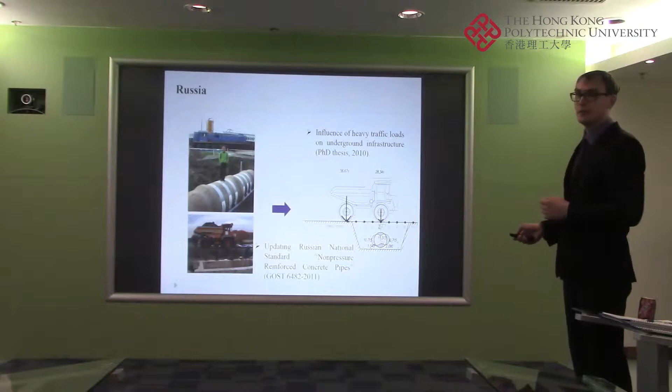Just very briefly, as Professor Shen mentioned, I got my PhD back in Russia in 2010, and I was doing my research about the influence of heavy traffic loads on underground pipelines and soil structure interactions, so a very technical topic.

After that, I was lucky to get a postdoctoral position at Tsinghua University in Beijing, and after that I worked as a lecturer as well, continuing research in the area of underground construction. This is my small research team with PhD and master students. In 2015, I decided that working for the industry would be more fun and more challenging than university.

So I moved to Hong Kong and joined Gammon Construction, and I was involved in many interesting projects here in Hong Kong, some of which got innovation awards.

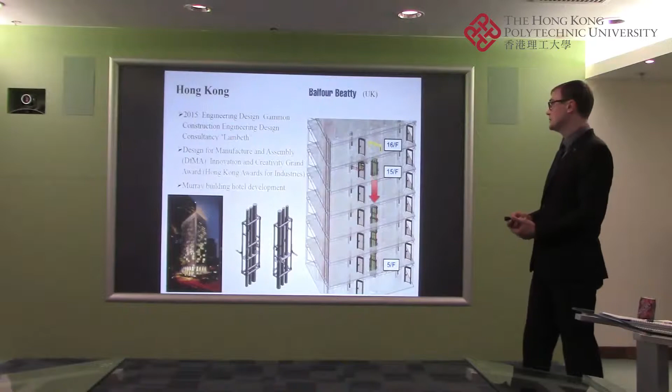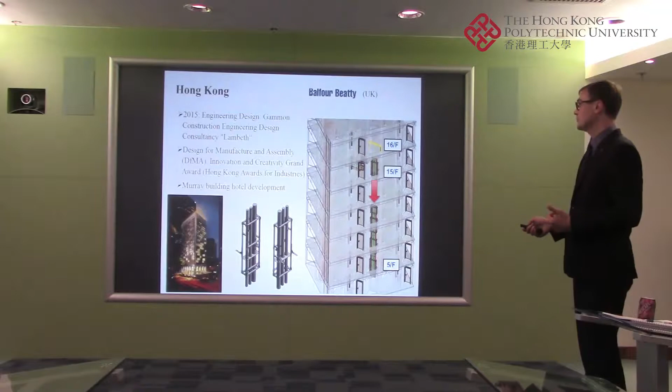For example, this is the Murray Building Hotel development. In this project, I was one of the first engineers to do the design for DfMA modules, which were prefabricated and installed in the building. As a company, we got a Creativity Grand Award from the Hong Kong Awards for Industries.

I was also involved in implementing new technologies in the Hong Kong construction market, for example the facade installation robot. This is the traditional way panels are installed — very labor intensive and dangerous, because you lift heavy panels above people, and workers stand at the edge of the building balancing a heavy panel.

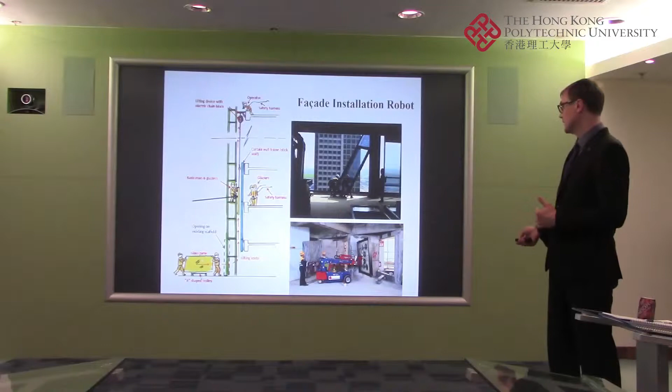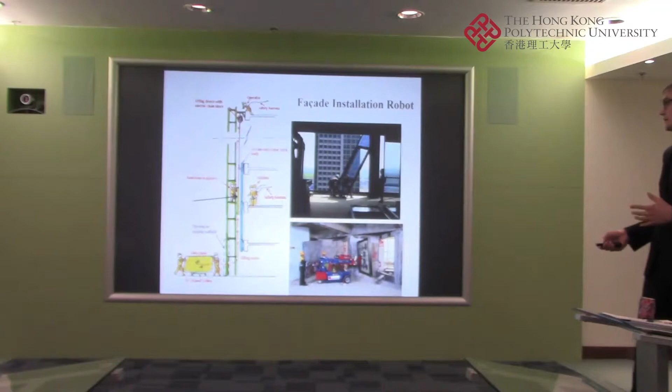This is the robot itself, which we used on the same Murray Building project. It installs the panel from the outside of the building. It's much safer, requires only 2 people, and is faster as well. After that, I was involved in many projects in Hong Kong, working with professionals from different countries.

This one is the West Kowloon train terminus, just next to a wonderful university where I worked, because it was a Leighton Gammon joint venture. Leighton is a company from Australia, so I worked with many Australian and New Zealand colleagues here.

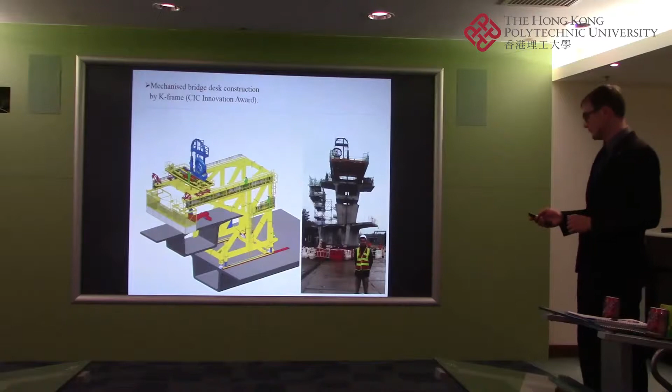When that project was completed, I worked on the Hong Kong-Macau-Zhuhai Bridge for 2 years. In this project, with my colleagues, we were involved in the design and manufacturing of the K-frame, a segment lifting installation device. We also got a Construction Industry Innovation Award for this frame. This is a brief introduction of how it works.

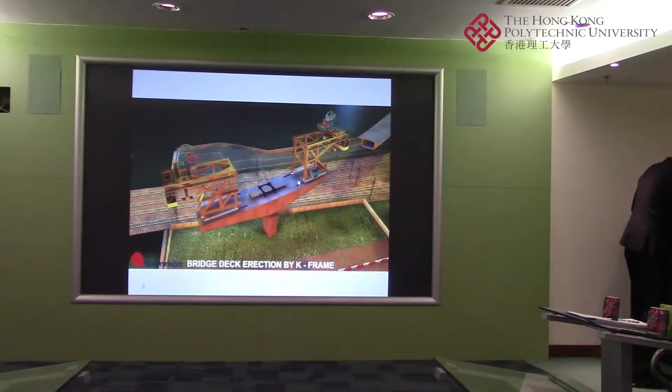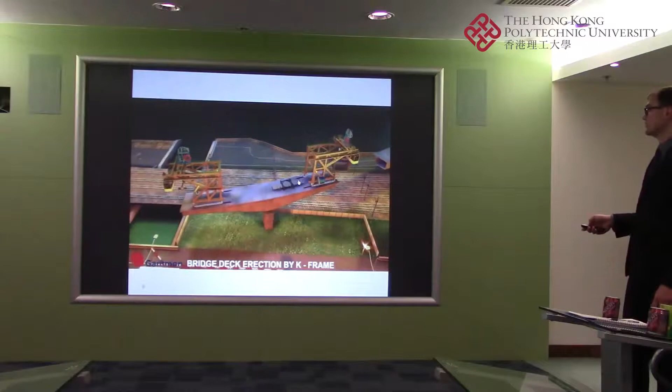So basically you have a pier of the bridge, you have several segments pre-installed, and you have 2 frames lifting simultaneously and installing the segments. So it's also speeded up the construction process and made it quite safe as well.

For Hong Kong Macau Zhuhai Bridge, I was working with colleagues from Freyssinet, so there were many French people because this company comes from France. Many of them actually had previous projects in Russia, so they could speak a little bit of Russian, like 'I'm too hungry, where to get the food,' and this kind of thing. But I really appreciate working with French people - they are very open-minded and not afraid to try new things and do something out of the box. That's why French companies in the construction market overall are expanding their business very rapidly. Maybe 10 years ago it was mostly companies from UK doing projects abroad, but now more French companies are working worldwide.

In my lecture I'm going to introduce several big infrastructure projects which were built in Russia. The first one is the venue for the Winter Olympic Games in Sochi - overall the budget was like $50 billion and many venues were built. The second part of the presentation will be about Moscow City, similar to Central, with a lot of high-rise buildings - it's like a business area where it used to be an old industrial plant before. And also a big infrastructure project, a $50 billion project for gas pipelines from Siberia to China for delivery of gas.

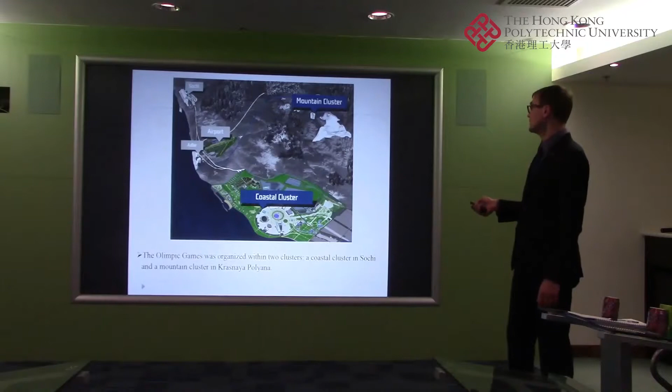So for this project we have 2 clusters - one is a coastal one, next to the sea, and one is a mountain one. Especially for the Olympic Games, a lot of new hotels were built for the residents. And this is the main stadium, Fisht Stadium.

Actually a lot of the venue and infrastructure projects which were built for the Olympic Games were used in summer last year for the FIFA World Football Cup. On this stadium, for example, there were some important games - when Spain was playing Portugal, when Uruguay beat Portugal, so Ronaldo was out of the World Cup on this stadium. So a lot of these sport venues were used last summer as well.

The shape of the stadium, or the shape of the roof of the stadium, kind of resembles a snowy peak, and you can also have a sea view since it's next to the sea. In Russia, a lot of new venues that are built try to resemble Russian spirit and Russian culture in some way.

We have the Bolshoi Theater in Moscow. So for the Winter Games, we also have the Bolshoi Ice Palace, which was a 12,000 seat venue for holding ice hockey games.

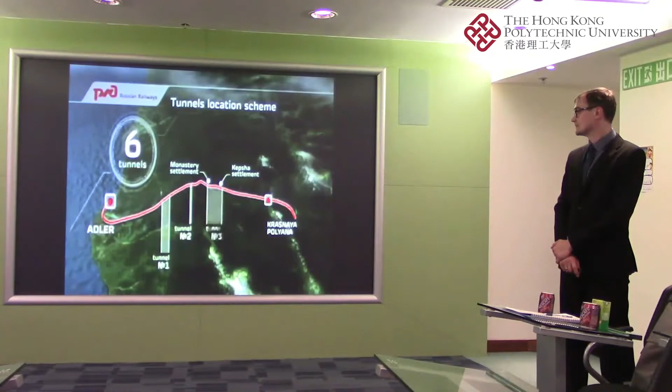The route from Adler to Krasnaya Polyana will be the main access linking the Olympic City and its settlements. Engineers face the difficult task of building the railway through mountains and hills, constructing 6 tunnels. About 50 kilometers of railway will connect a new airport terminal to a mountain resort.

6 pairs of electric trains will carry passengers from one end to the other within 30 minutes. The estimated capacity will reach 8,500 passengers an hour.

The construction process has already begun. Since 2008, the works have been carried out according to schedule, and there are no doubts that we will meet the 2013 deadline, a year prior to the Olympics. Construction in the mountains is always a challenge, but besides strict deadlines, there are also 4 key restrictions: strict safety measures, strict comfort conditions, strict environmental control, and strict budget control. All these requirements are being met.

Safety is a matter of crucial importance. Here's one example: railway traffic control. Apart from traditional procedures, train services will operate using the GLONASS satellite navigation system. The train moves without stops, which means effective passenger control.

The Desiro trains, designed by the Siemens Company, are specially designed trains for the project. Comfort and convenience for passengers, including those with limited mobility, are among the major priorities.

The environmental issue is also important, as the railway will run through a national nature reserve. Special noise reduction techniques will be enforced here, and road crossings for safe animal passage will also be built. Of course, the trains are electric, the most ecological ones.

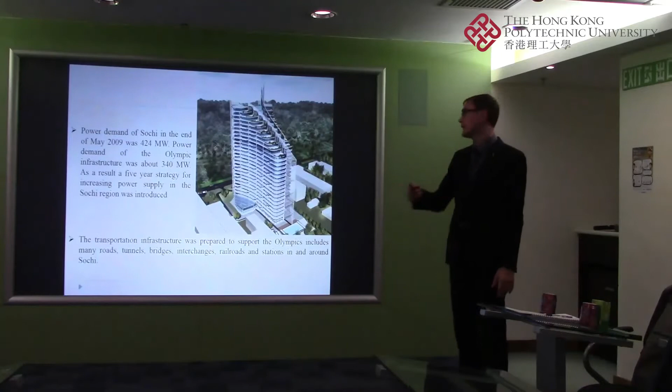Overall, just to show the scale of the construction for the Olympic Games, this is the electricity or power demand for the city prior to the Olympics. Olympic infrastructure essentially requires nearly the same amount, so basically you need to double your power generation capacity just to satisfy the Olympic infrastructure. And during the preparation for the Games, we have 15 modern sport venues built and also hotels for 10,300 guests.

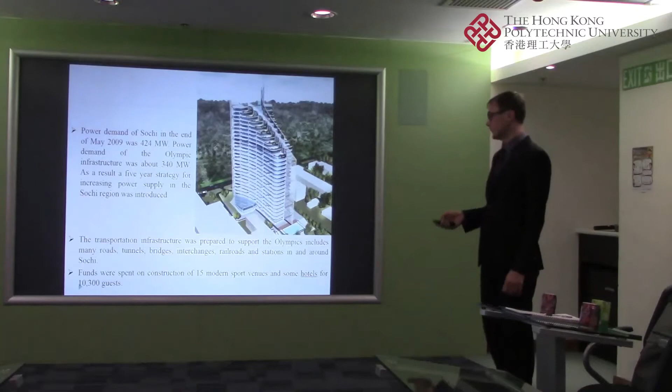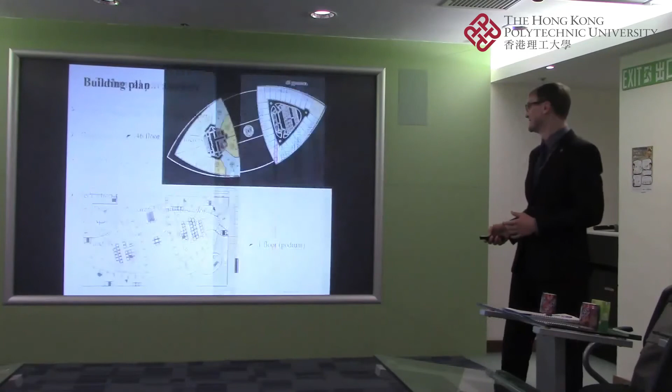This is the building plan. I want to show on this slide that many international companies, which are leading experts in their particular area, were working on this project in Russia.

For example, the structural engineer is Thornton Tomasetti from New York. We have German companies for mechanical engineering, a Turkish company for the foundation, the Chinese company China State for the superstructure, and even a company from Shenyang for the facade installation works. So you can see, because Russia is kind of in the middle between Europe and Asia, we also have a mix of Asian and European companies working on large-scale infrastructure and building projects.

So for example, these are colleagues from Shenyang, the facade company.